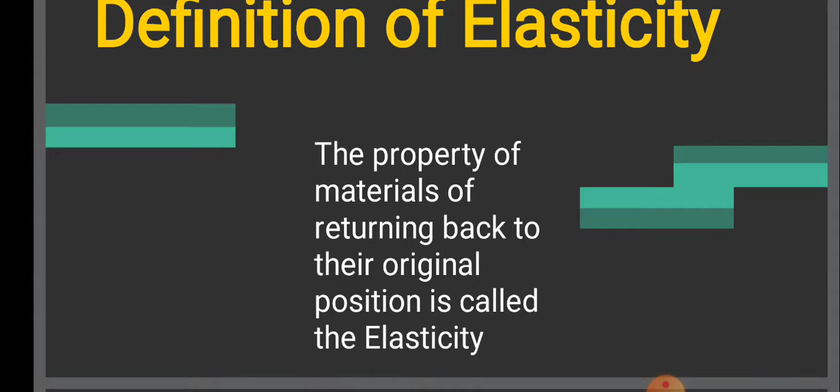If we consider a rubber band, normal in shape and size, whenever there is no external force acting on this rubber band. But the rubber is enlarged by applying the external force, then it becomes thin and its size becomes large as compared to original size, but it becomes elongated up to a certain limit.

And whenever we remove the external force applied on this rubber, the rubber can regain its original shape and size.

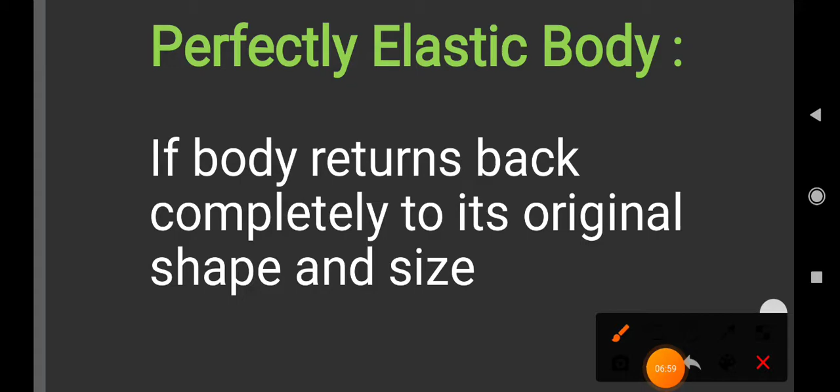Now the bodies are considered in between two ways. One is the body is perfectly elastic body, or another, that is perfectly inelastic body. Those bodies which return back completely to their original shape and size are called perfectly elastic bodies.

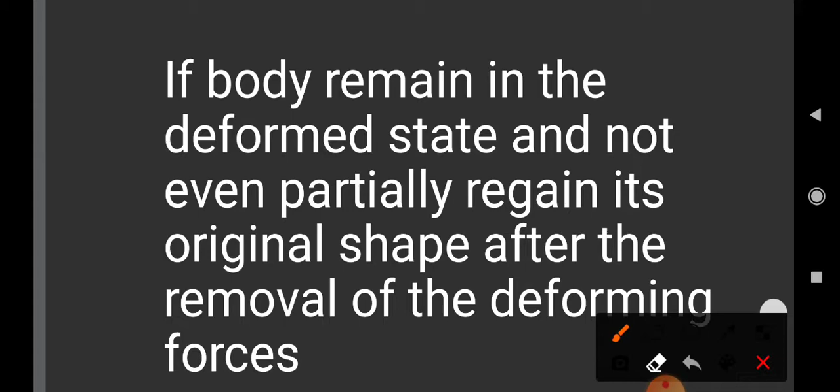And those bodies which do not regain their shape and size, even partially, after the removal of the deforming forces, such bodies are called perfectly inelastic bodies. So what is a perfectly inelastic body?

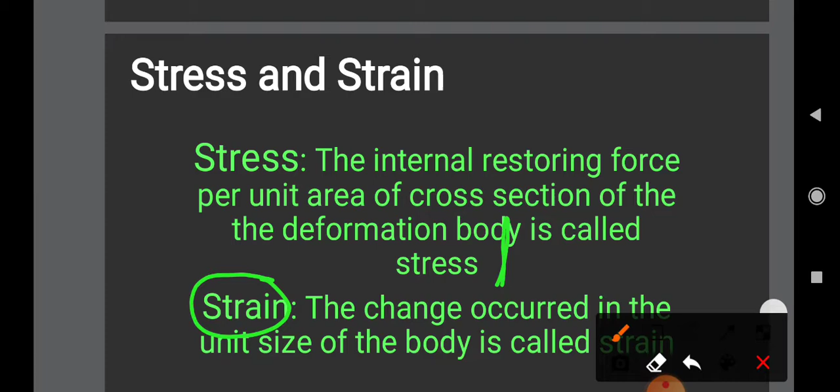And what is strain? Strain is the change occurred in the unit size of the body. That means the ratio of the new change compared to the original dimension is called strain.

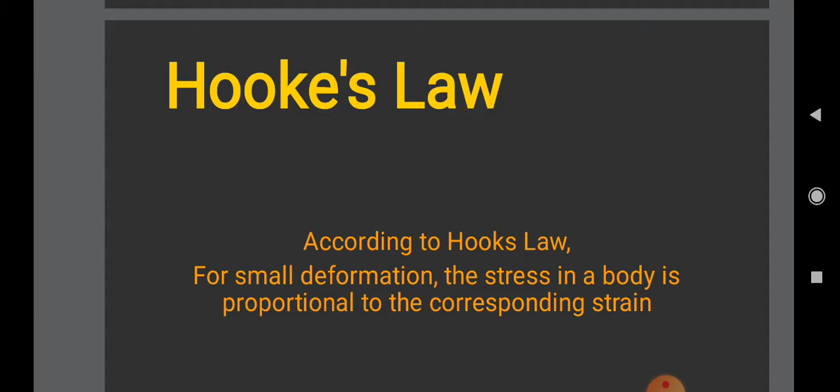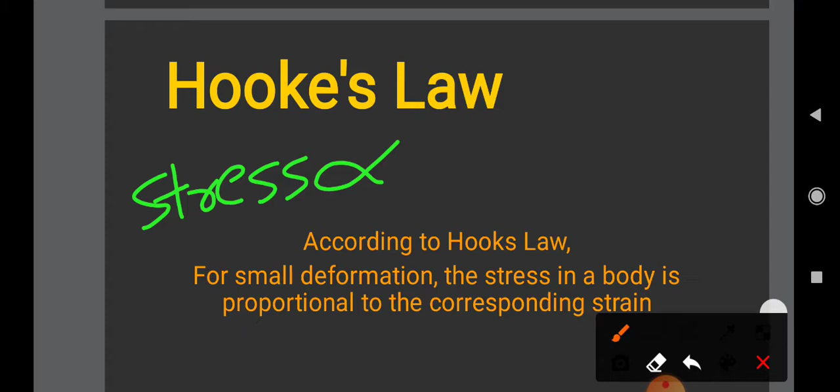According to Hooke's law, which is very useful for calculation of modulus of elasticity - what is the statement of Hooke's law? According to Hooke's law, for small deformation in a body, the stress in a body is proportional to the corresponding strain. That means stress is directly proportional to strain.

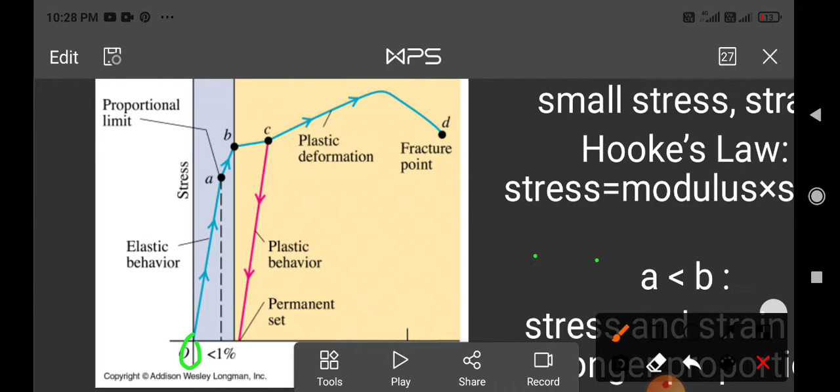But Hooke's law is applied only within the elastic limit. This picture shows when the elastic limit is between 0 and A.

The stress is also small and strain is also small, and hence stress is directly proportional to strain in that condition.

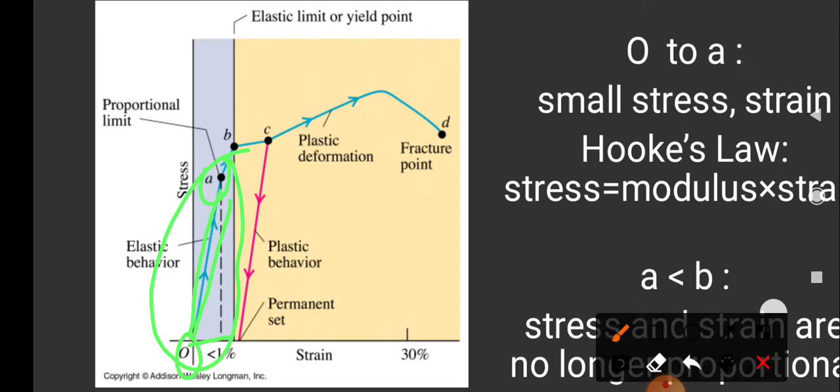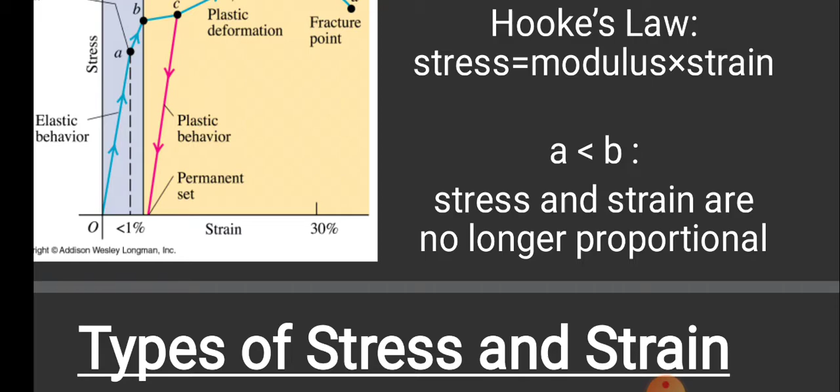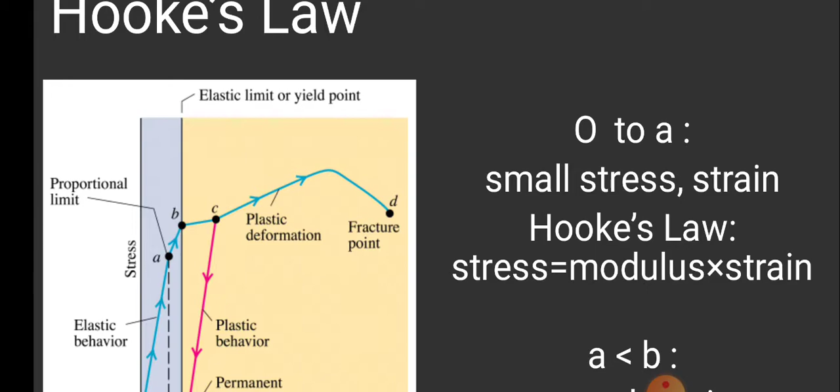That means beyond a certain point, stress and strain are no longer proportional. This is because across the elastic limit, that point is called the yield point. Across that yield point, the deformation becomes partial or permanent, and hence the body does not regain its original dimension - that is, its original shape and size. Hence, Hooke's law only holds good up to this portion.

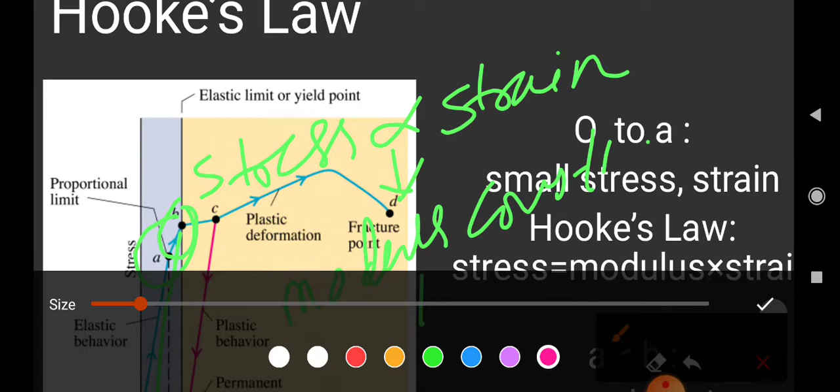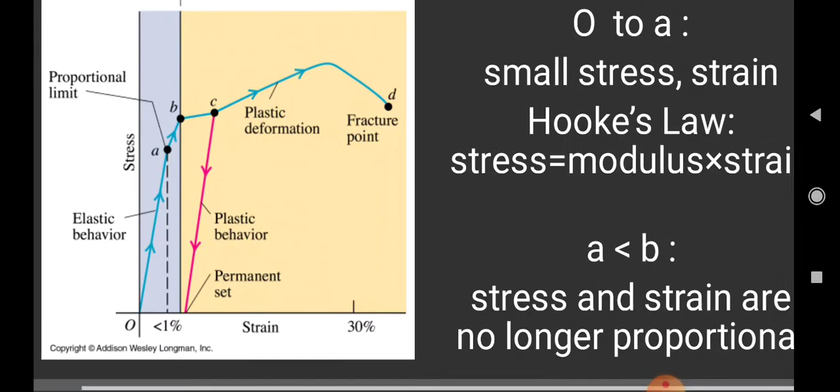So within the elastic limit, stress is directly proportional to strain. This proportionality constant is called the modulus constant, and there are three types of modulus constant, depending on the type of stress and type of strain.

There are three types of stress: tensile, also called longitudinal stress; bulk, also called volume stress; and shearing stress.

Similarly, there are three types of strain: tensile strain, also called longitudinal strain; bulk strain, also called volume strain; and shearing strain.

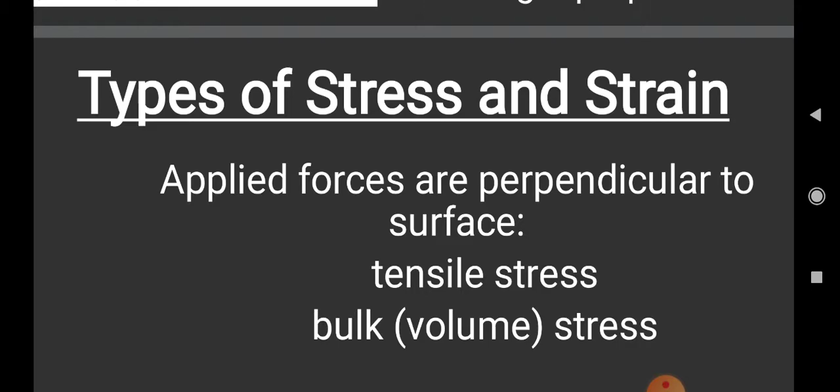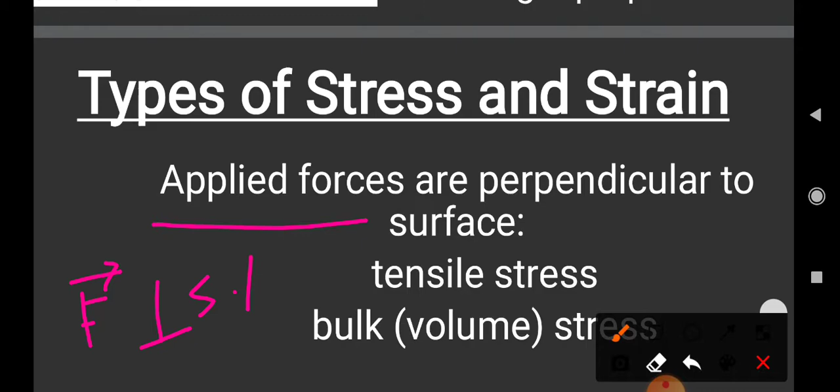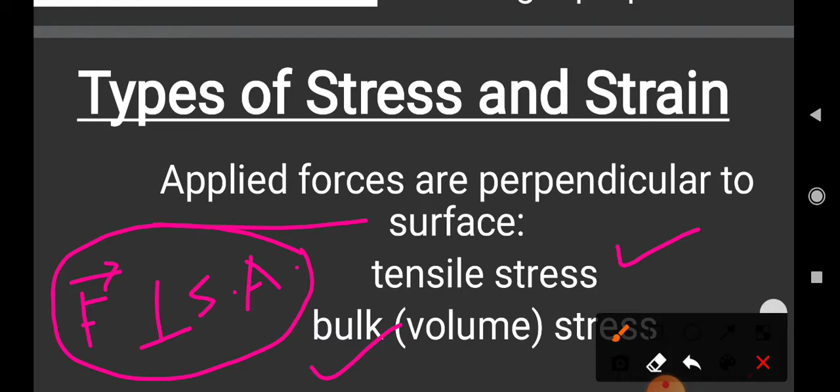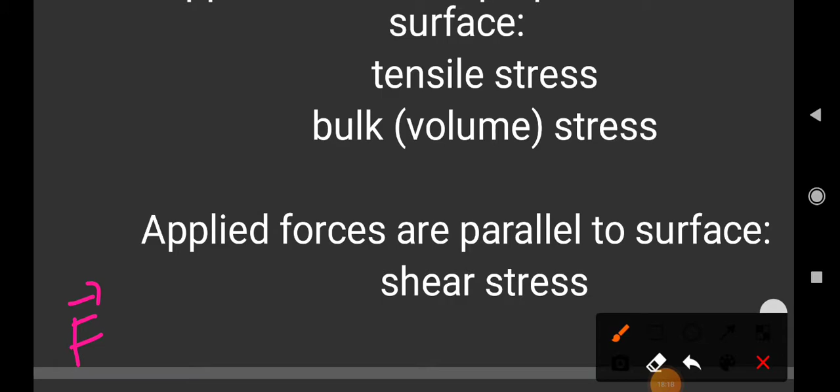Stresses are also classified in two ways. If the applied force is perpendicular to the surface area, on the basis of this phenomenon there are two stresses: tensile stress and bulk stress. And if the applied force is parallel to the surface area, that stress is called shearing stress.

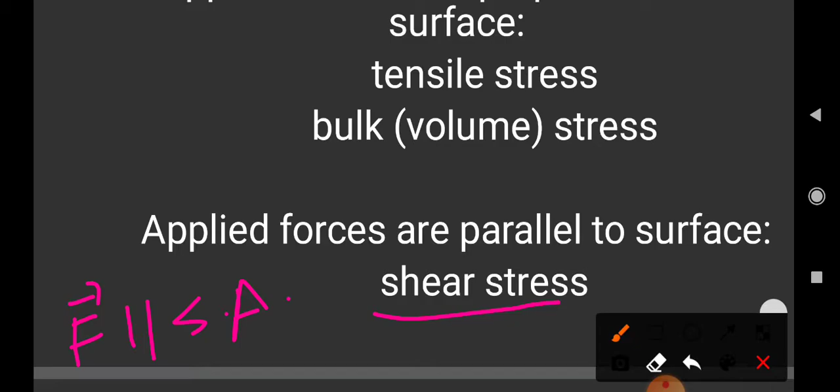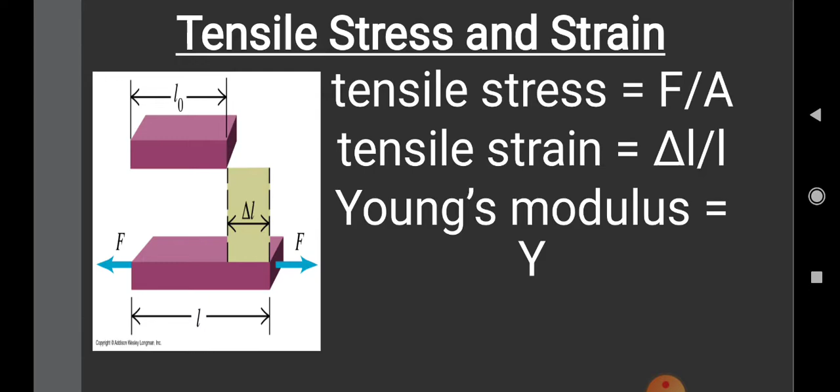Now this picture shows when external force is applied on this body - this is its original length. If force is applied on both sides, the body will be elongated, causing a change in its length. L naught is its original length, delta L is the change in length, and L is the elongated length.

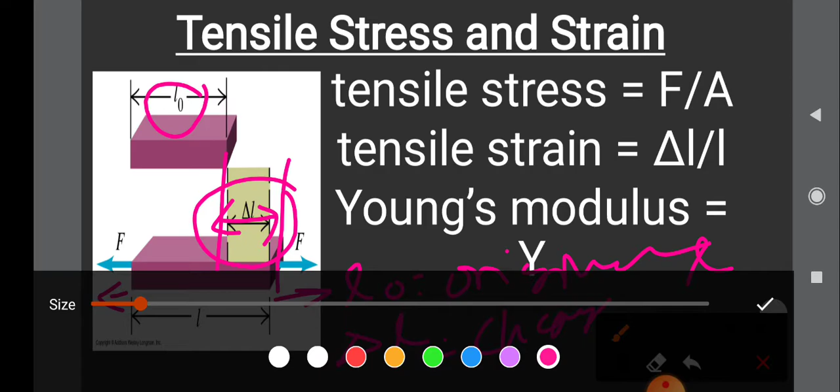So what is tensile stress? Stress is simply the applied force per unit cross-section area. And what is tensile strain? It is the change in length, that is longitudinal change, divided by its original length.

So, on the basis of tensile stress and tensile strain, according to Hooke's law, Young's modulus is defined as the ratio of tensile stress and tensile strain.

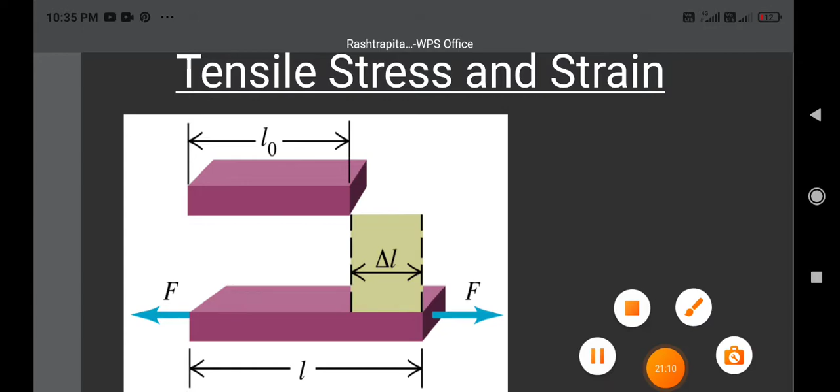Tensile stress and tensile strain. So Young's modulus is defined as tensile stress by tensile strain. Now the equation is: Young's modulus is equal to stress, that is force upon area, and tensile strain, that is change in length divided by its original length.

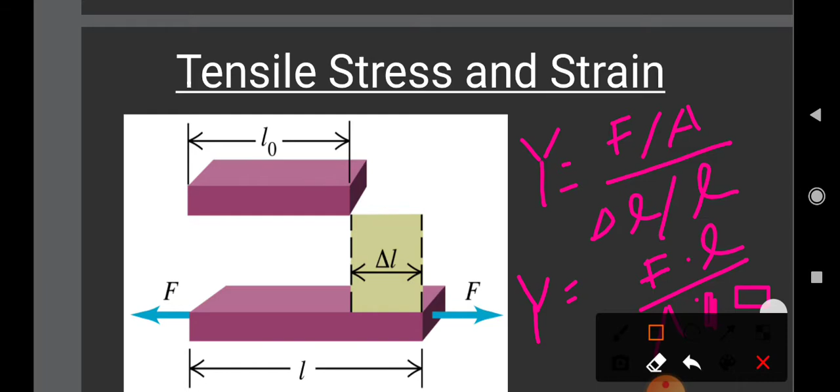Strain simply means change in dimension divided by its original dimension. So after solving this equation, we get Y is equal to F into L divided by A into delta L. So this is Young's modulus.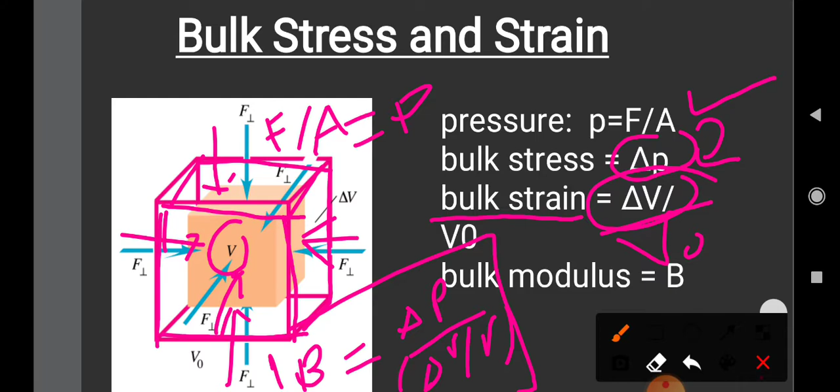divided by change in volume by V, that means change in, that is bulk strain. This is the equation of bulk modulus of elasticity. Now this bulk modulus of elasticity has equation beta, or it is simply B is equal to minus delta P divided by delta V by V, or V naught, that is original

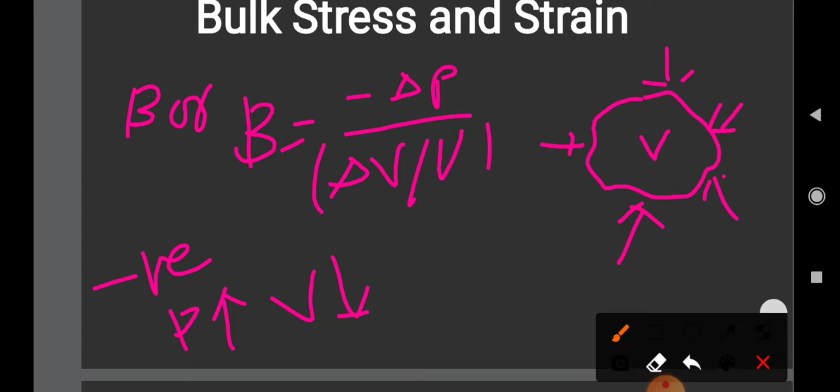volume. When the force is applied from all sides on the surface of the body, the original volume will be changed due to compression, and hence the negative sign implies that when the pressure increases, the volume will decrease, and vice versa. Due to this, there is another term: compressibility. Compressibility is defined as the reciprocal of bulk modulus, and hence the reciprocal of bulk modulus of the material of a body is called compressibility of that material.

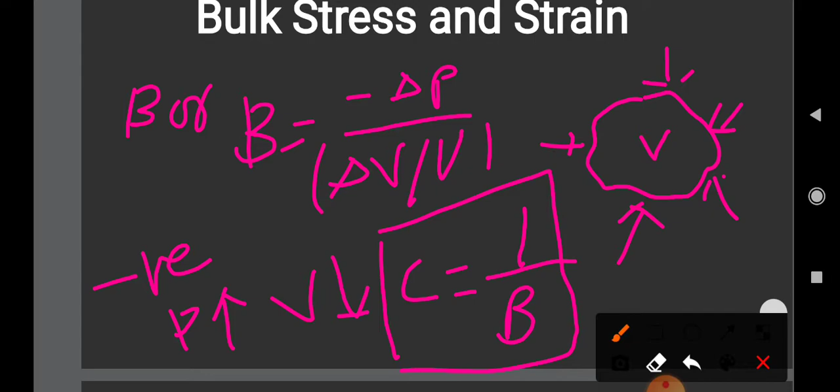Now the last modulus of elasticity is modulus of rigidity. This modulus of rigidity is the ratio of shearing stress by shearing strain. So when the body is acted upon by an external tangential force,

this is the base of this body, and that force will act tangentially on this body. So when the body is acted upon by an external force tangential to a surface of the body, the opposite surface being kept fixed, it suffers a change in shape, but its volume

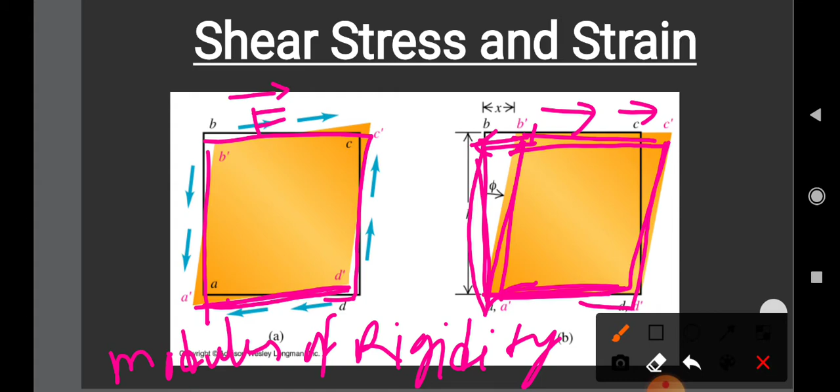Tangential force acting per unit area of the surface is called shearing stress, and shearing strain is the ratio of the displacement of layer in the direction of the tangential force. This displacement is from its original position. So the ratio of the displacement of layer in the direction of the tangential force, and the distance of the layer from the fixed surface, is called shearing strain. And modulus of rigidity is equal to

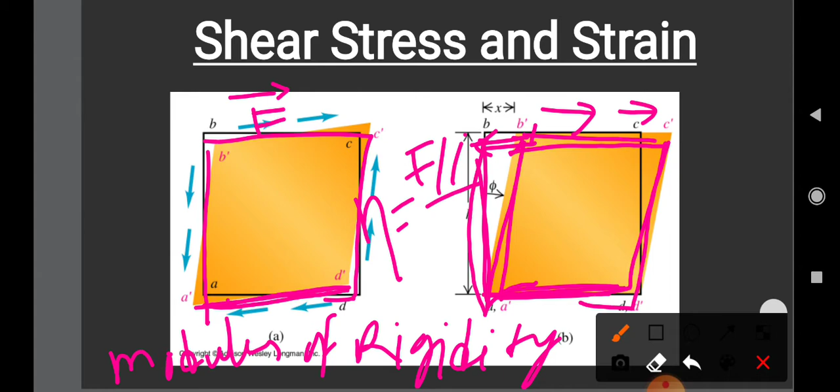fixed position. So A B, that means this equation shows that this is a quantity of tan theta. There is consider phi, so I am also considering it here as phi.

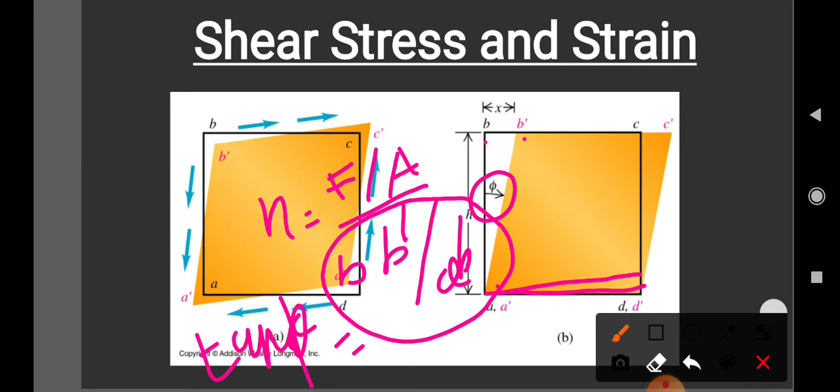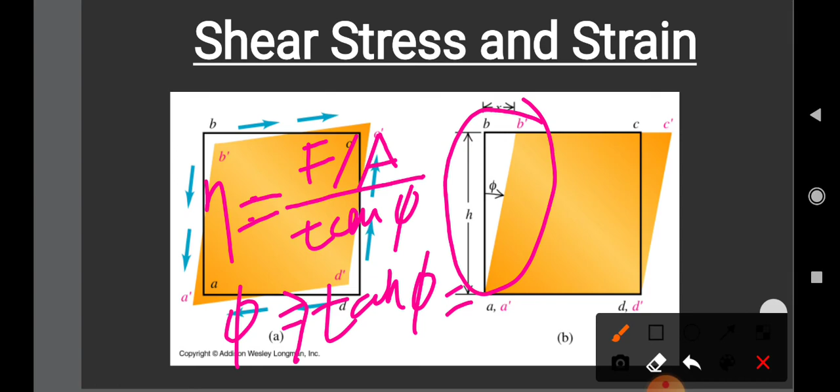So now the modulus of rigidity is equal to F by A, that is shearing stress, and this quantity due to this displacement is considered as tan phi, but phi is very small, hence tan phi is considered as only phi, and hence eta is equal to F by A divided by phi, or we also consider it as theta.

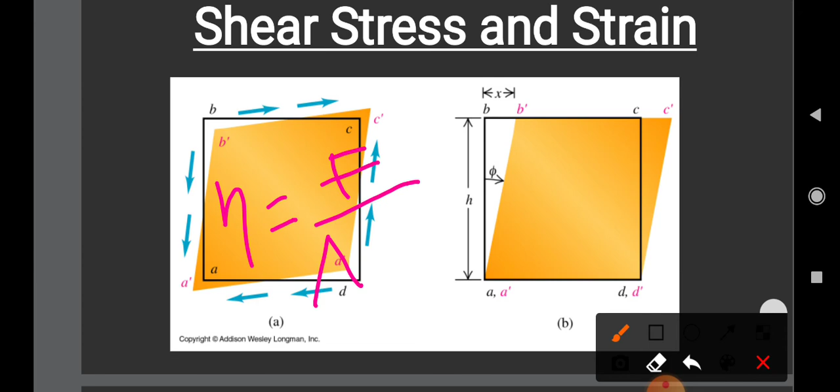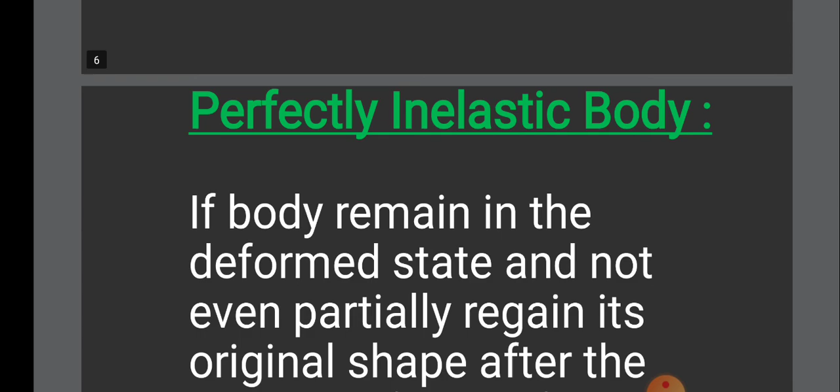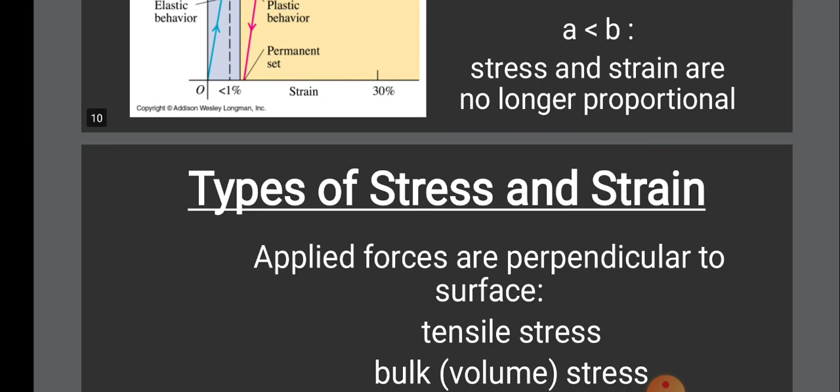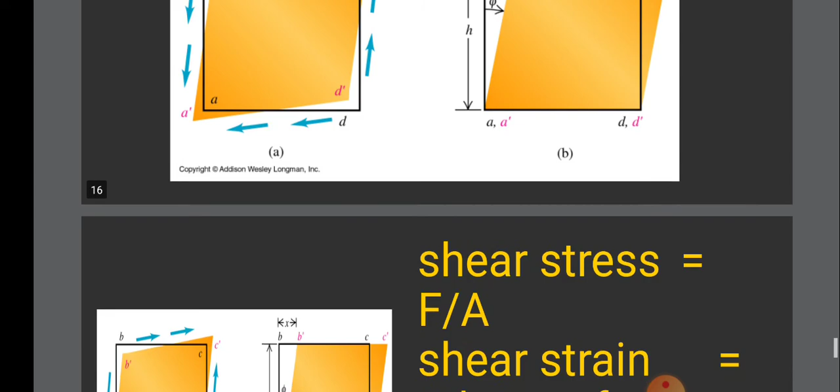So in this lecture we studied the properties of elasticity, definition of elasticity, deformation of body and internal resistance, elastic limit, perfectly elastic body, perfectly inelastic body, types of stress and types of strain, Hooke's law, and also the modulus of elasticity. There are three moduli of elasticity: Young's modulus, which is the ratio of tensile stress by tensile strain, bulk modulus, and finally modulus of rigidity. Thank you.